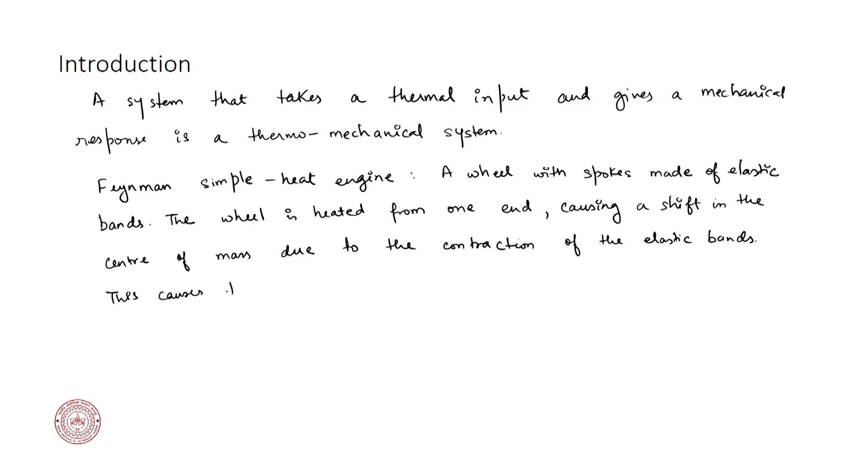due to the contraction of the elastic bands. This causes the wheel to rotate. So, we have a wheel, the spokes of the wheel are made of these elastic bands about a center of mass at the center.

Okay. So, initially this wheel is at rest, the center of mass is aligned with the axis of rotation. Now, we attach a heat source. Okay. So, this is a heat source, this is our wheel, and these are our elastic bands.

Okay. So, the rubber which is near to the heat source might change its composition, and based upon the type of polymer it might shrink or it might expand. However, any change in the length, either the contraction or expansion of the rubber, will cause a change in the center of mass or a shift in the center of mass of the wheel, which was initially perfectly balanced.

Since the center of mass has shifted, the wheel will try to manage that, and it will rotate a bit. As soon as it rotates, the rubber band that was exposed to heat will be exposed to the colder side or the cooler side, and therefore, those will again expand or contract in the other direction, and the new set of bands will be again exposed to heat. In this way, the wheel will be under continuous rotation.

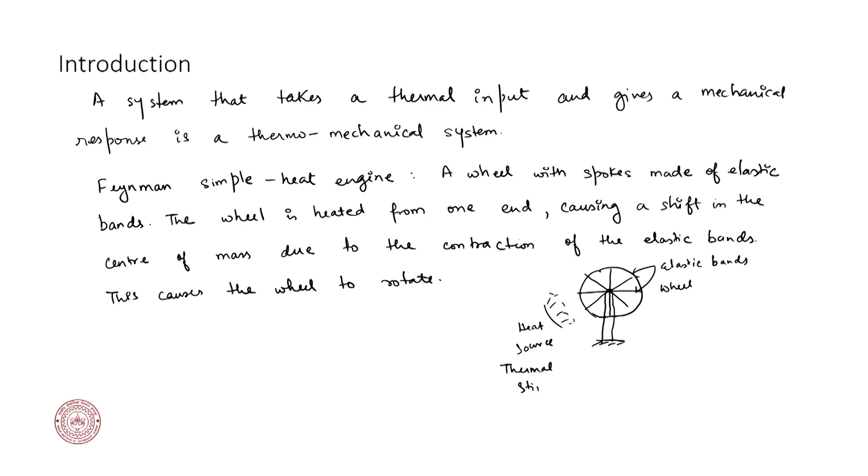The wheel is not rotating on its own. We have a thermal input that is driving the wheel to rotate, and therefore, a thermal stimulus is giving a mechanical response. Such a system comes under this category of a thermoelastic or a thermomechanical system.

Okay. And this mechanism of thermoelasticity is used in devices like micro electromechanical systems or nano electromechanical systems for causing motions like pull, push, or to perform some kind of work, bend, slide, etc.

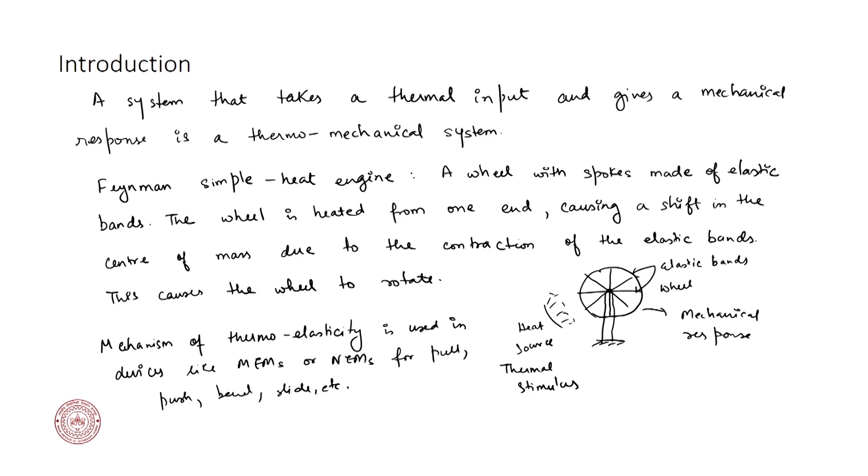Right. So, to these smaller structures you can provide inputs of heat, small bursts of heat, and heating can be done through an electrical contact via ohmic resistance. We have not gone into the electromechanical systems yet. However, electric heating is one of the most common ways of heating. So, you can provide small inputs of heat, and that heat would cause a mechanical deformation. That deformation is our output and can be used for certain aspects.

Okay. Now, we will talk about two phenomena. One is called the thermoelastic dampening and thermal stresses. So, two, we can say, mechanical responses that dampen or weaken a thermomechanical system. So, these are the two phenomena that work against this process of a thermal input converting into a mechanical output, and that is thermoelastic dampening and thermal stresses. So, what are they? The first one is your thermoelastic dampening.

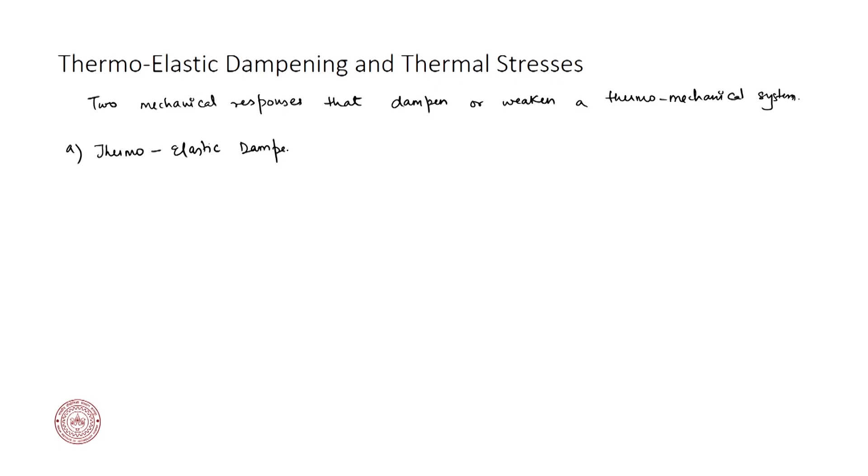Okay. So, when a surface is impacted by a pulse load, what I mean by a pulse load is that you hammer onto a metal surface, that is a shock load or a pulse load. The elastic waves are generated, and this comes from the Navier's equation. So, Navier's equation we see is a wave equation.

If you go back a couple of lectures into solid mechanics, we have derived the Navier's equation in depth, and we can see that the equation del square u by del t square equals some mu del square u by del x square is a wave equation, and that means these elastic waves would propagate through the body. So, as the elastic waves are generated, they propagate through the body and reflect at the edges.

Okay. So, if I strike it at one end, then the waves are generated from this point and they will propagate throughout, strike the end and reflect back. Likewise, they will strike the other end and reflect back. Okay. The reflected waves may collide with each other and get dissipated in the form of heat.

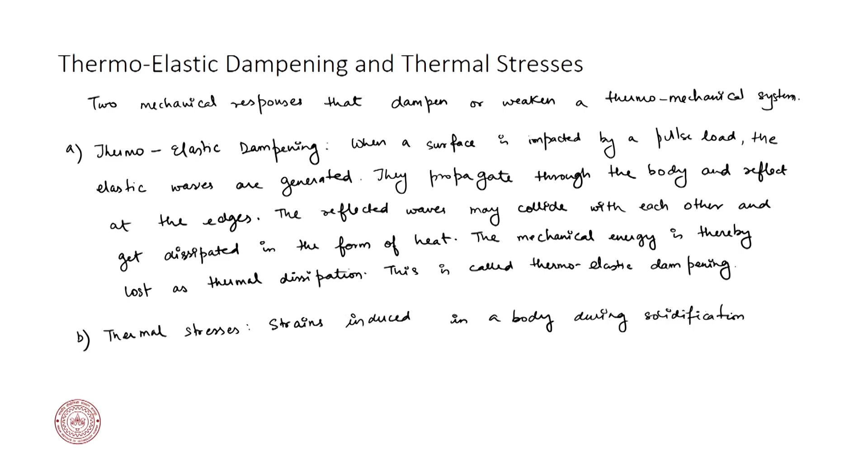The second type of dampening or degradation phenomena will be a thermal stress. That is strains inculcated in a body, or rather strain induced might be a better term, during solidification or cooling, and due to thermal gradient causes stress generation.

That is, if you have manufactured a body, that is initially it is molten and you have cast it and it is cooling down, or you have machined the body and locally the temperatures have increased, there is thermal gradient because surface is dissipating heat quicker than the bulk. So, there is a temperature difference. This temperature difference causes strains within the body, that is some part would have expanded more compared to another.

As everything would cool down to room temperature under constrained conditions due to the mechanical constraints, that is the surface is held together due to some reason, and due to the lack of free movement of the surface, these thermal gradients would induce localized strains within the body. These localized strains translate in the form of stresses, and these stresses are called thermal stresses.

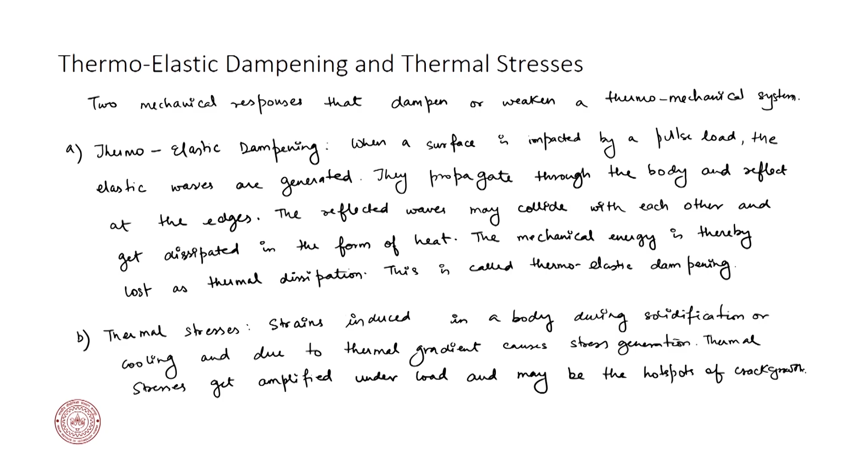These stresses are a major location of crack formation and dislocation growth, and when we impact the body or when the body is under load, these localized strains or stresses get magnified, and the magnification of these causes a fracture to propagate through. Okay. So, the thermal stresses get amplified under load and may be the hot spots of crack growth. So, these become the hot spot for the fracture to propagate or for the crack to grow.

Okay. So, these are the two dampening responses of a body. This is natural, it will be there in any mechanical system. There are ways to mitigate thermal stresses: if you allow a more uniform cooling, a slower rate of cooling, that is annealing compared to hardening, right. For those who study manufacturing sciences, if you cool down a body very gradually, then it does not develop thermal stresses and it remains more ductile compared to a body which is very rapidly dropped into a quenching medium, and it is hardened in that regard.

So, it becomes hard and brittle because of the development of internal stresses, and those stresses become the point of crack growth, and the body eventually fails. Right. So, apart from these two, thermoelastic processes can be used to get a mechanical response from a thermal input, and we will look at 6 examples of such thermomechanical devices. Okay. The first one is our thermopneumatic systems.

Okay. So, in these devices a gas couples the thermal source to the mechanical response or deformation. So, the heating does not directly cause the body to deflect or to deform. There is an intermediate gas or fluid which is taking that effect of the heat to the material that is getting deformed. So, that is a thermopneumatic device.

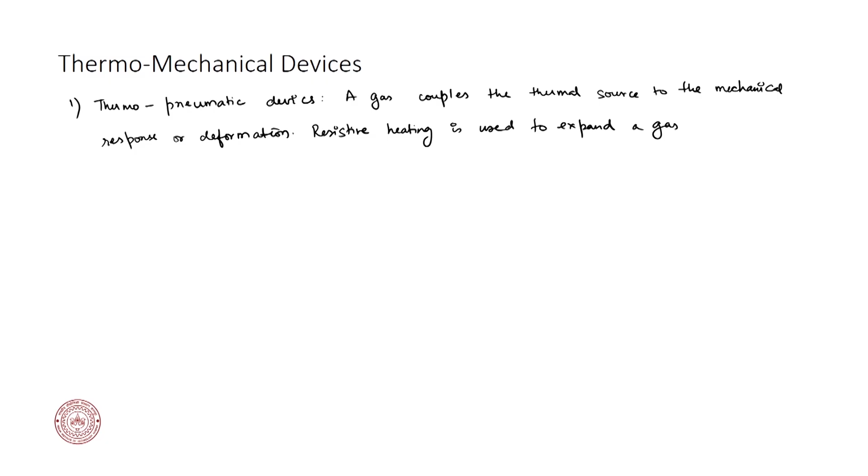So, the expanding gas will exert a pressure on a membrane or plate, which will deform. Okay, so, that is the basic idea behind thermopneumatics. Unlike thermoelastics, which will have a direct deformation under a temperature gradient, in this case heat is translated through a media to the body.

Let us take an example. So, one of the examples can be a peristaltic pump. So, a peristaltic pump, if I draw it, it is a very crude diagram. So, we have these small membrane pumps at the bottom. So, we have our flow through this tube. So, this is a tube. We have these small actuating devices. What they have is that the bottom plate is a resistive heater. So, these are resistive heaters.

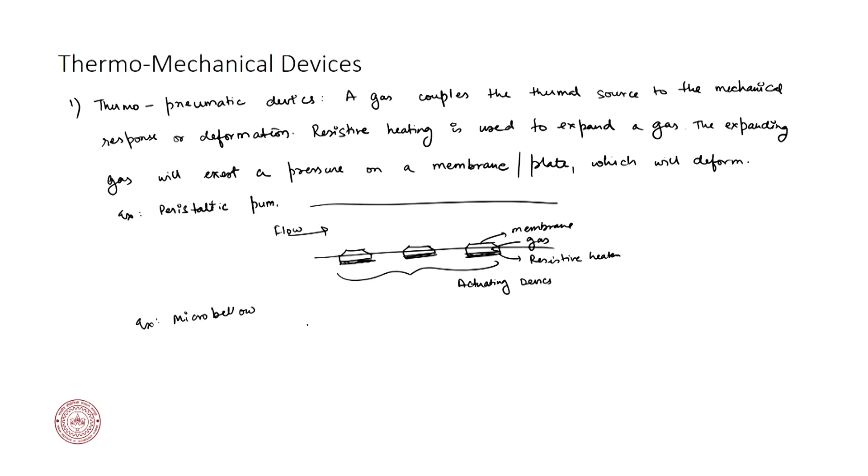Another example can be a micro bellow. So, a micro bellow device is this small segment of this actuating device. So, they have a membrane on the top, and they have a heater at the bottom, and this is filled with gas. They have a resistive heater, they have a membrane on the top.

So, this membrane is going to deflect as the gas would expand, and the actuation of this membrane can be used for some mechanical response, for example, in the peristaltic pump. So, we can put in small micro bellows at the peristaltic pump, and that will regulate the flow, right. Likewise, it can be used for other applications, where this deflection on and off of these membranes can be used for certain actuating purpose, right.

Okay. The second kind of device is a thermoelastic device. Now, this is what we typically would understand by thermoelasticity or thermomechanical response. So, in this case, the material deforms under the influence of a thermal gradient.

So, you can say that we have some form of a cantilever. You are giving some heat input from here that is causing a T hot and a T cold. This gradient would cause the cantilever to expand and to deform, and that deformation is used as an actuating purpose. So, the deformation is used to actuate a mechanical response.

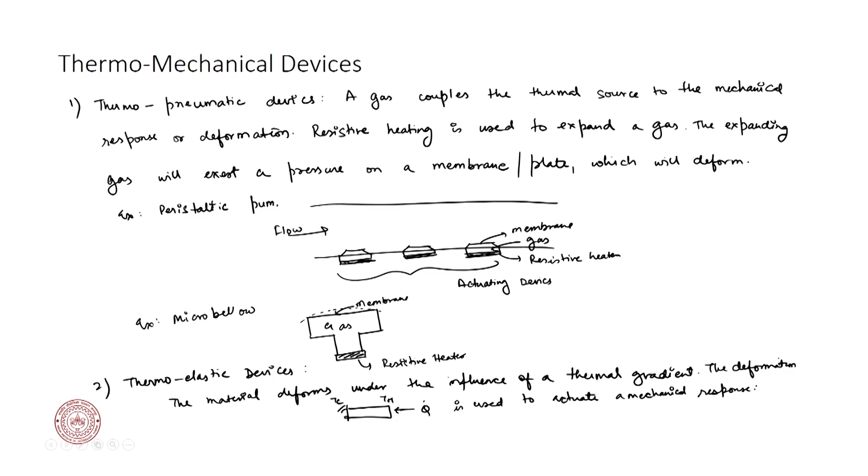Okay. So, this is a very simple example of a thermoelastic device. You are giving some heat directly to the device that is causing it to expand due to its thermal expansion coefficient, and based upon thermal expansion coefficient we will get some strain. That strain or that mechanical response can be used to actuate.

Okay. And the third one is a V-beam actuator. So, thermoelastic. Now, we are going into the domain of thermoelastic systems. Again, in this device what we have is two rigid plates at the two ends, and we have a structure connected onto a rod that is giving us the mechanical response. Okay. Now, we are giving electrical inputs to both the ends.

Which means that both these fixed ends are heaters. They are heating elements and they are at a higher temperature T hot. This central part is at a lower temperature T cold, and it is getting a force as an output in this direction. Okay. So, we are getting an actuation in this V beam, this elastic material. It can be made of any kind of alloy, it can be a polymer, based upon our objective to optimize based upon the thermal expansion coefficient.

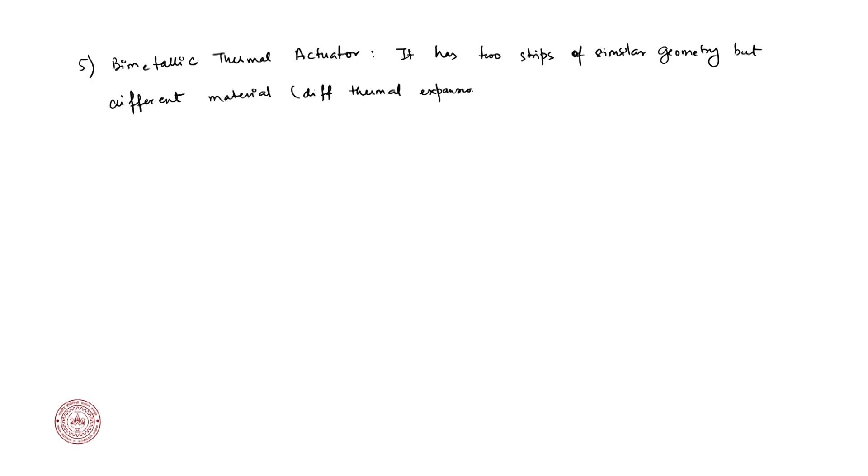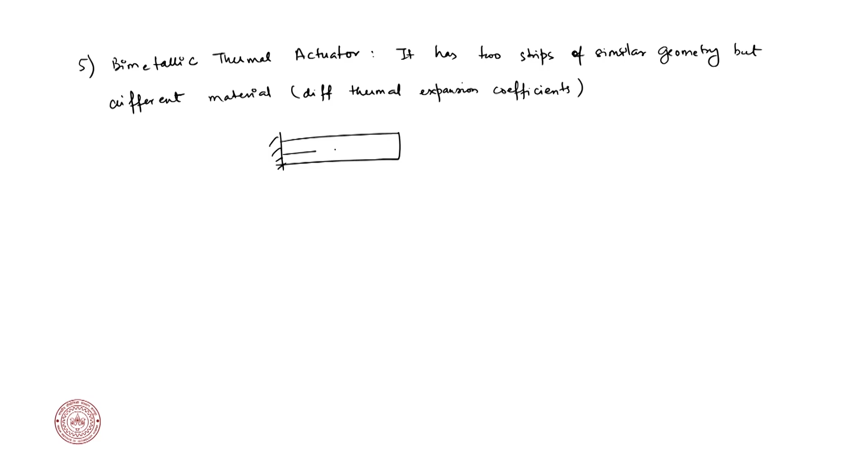Right. So, we can take, say, a cantilever, which is having two materials, more or less a similar geometry. You can take different geometries as well, but different geometries are more similar to this bimorph structure, which has the same material but different geometries. In a bimetallic actuator, you have two materials. So, you have an alpha 1 and alpha 2, more or less a similar geometry.

Now, if you put a thermal gradient, it will cause one strip to expand more compared to another, thus causing the structure to bend or deflect. And this is the kind of response we look for.

For example, if alpha 1 is greater than alpha 2, then the top would like to deflect or displace more compared to the bottom, and is likely to bend downwards. So, if you have, say, this is the bimetallic and it is divided into two halves, and you have an electrical contact like this, due to thermal difference, the top will like to bend more and it will deflect downwards, and the contact is cut off.

When it will cool down, it will come back to contact. So, we can have a thermal switch like this, which can cut off when a certain temperature is reached, and it will remove from the contact, and once it is cooled down, it will go back into the contact. And that is the beauty of a bimetallic actuator, a bimetallic strip.

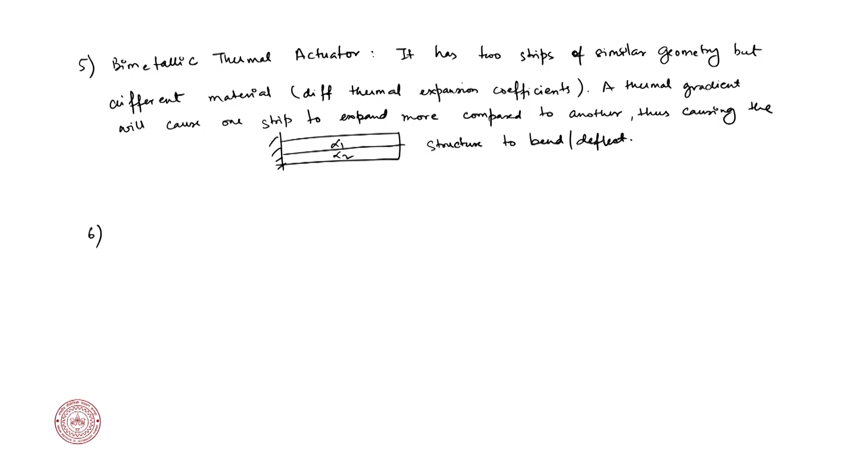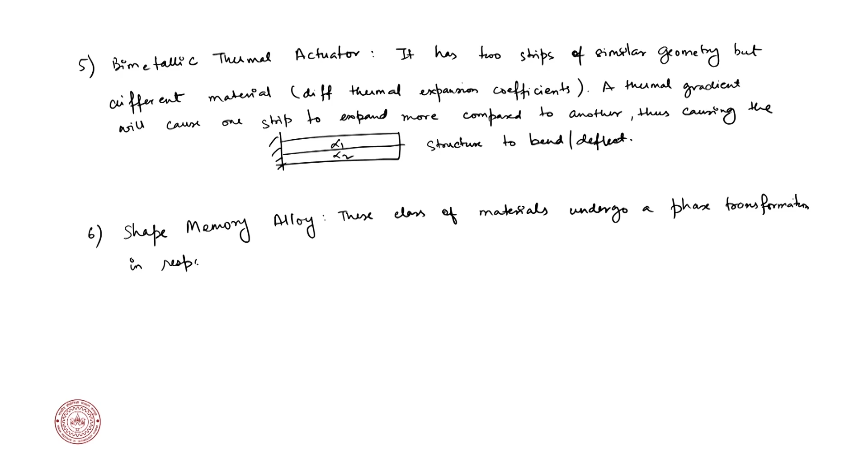The last one is quite interesting. It is called a shape memory alloy. So, what is a shape memory alloy? Unlike a bimetallic strip, in which the material expands and contracts, these materials, or this class of materials, undergo a phase transformation in response to a temperature change.

So, due to a temperature change, it will undergo a phase transformation, which, for example, steel can go from austenite to martensite, and these phase transformations can make the materials from less ductile to more ductile, and therefore, you can train the material to a certain shape or to take up a certain shape.

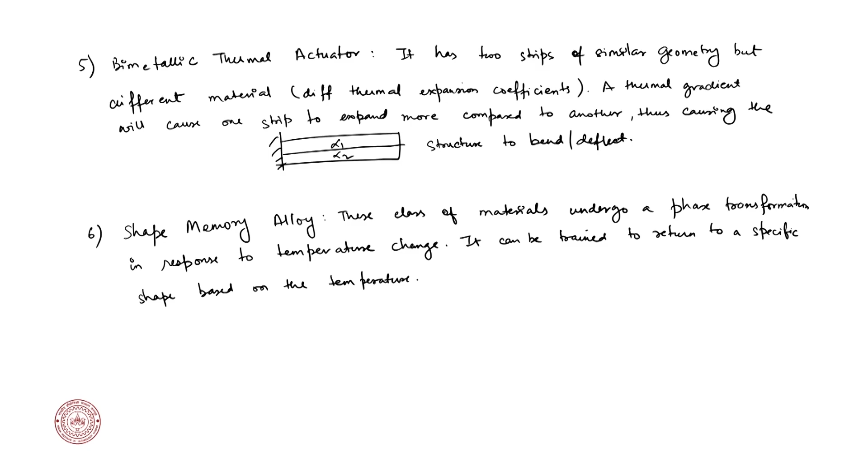It can be trained to return to a specific shape based on the temperature change. So, these materials can be trained to attain a certain shape at a given temperature.

Okay. Now, with this introduction, we know that there are several applications of these thermomechanical devices, and it is something that you can practically use in some sort of an engineering application, in a control system or the development of a larger equipment.

Right. So, we will start with the modeling or the development of a model for a thermo-pneumatic system. We will start with a very simple case of a mass spring system, and we will gradually move on to more complex systems. Okay. So, for a mass spring system, we can consider a piston cylinder assembly.

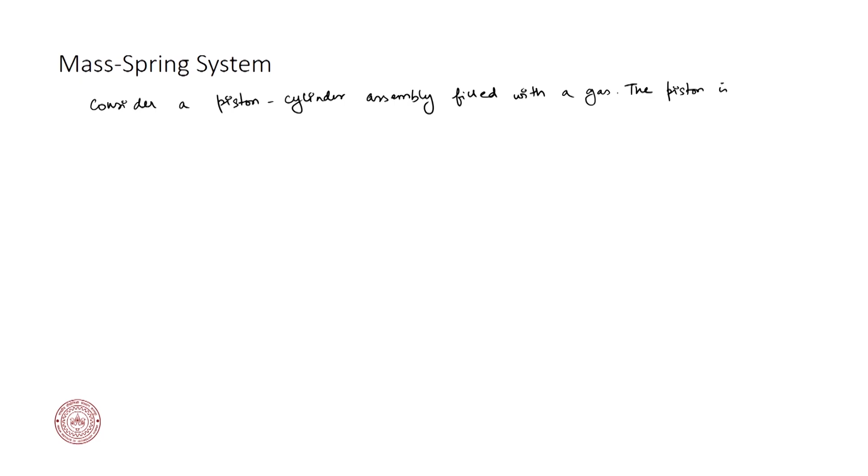Filled with a gas, the piston is connected to the bottom wall by a spring. Okay. So, let us draw this geometry out.

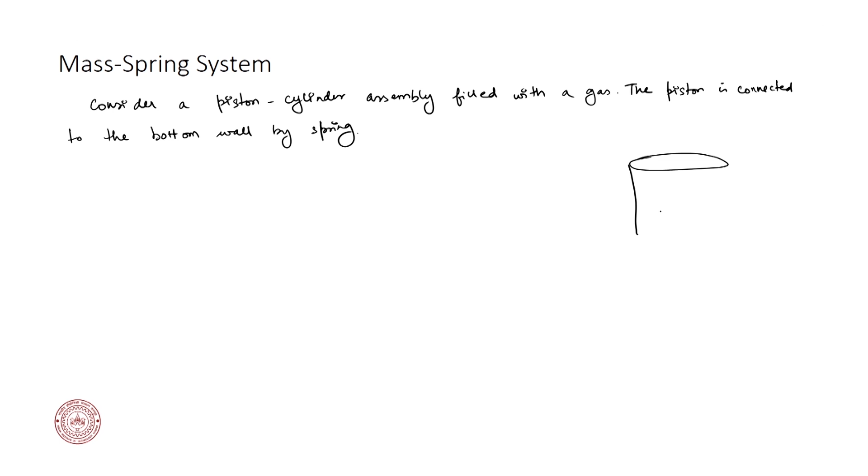So, you have this piston at the top, the solid piston, it is rigid. This piston is connected through a spring to the bottom plate and it is filled with a gas. The spring has a spring constant of small k. This is your piston and this is your cylinder. So, this piston can move based upon the expansion of the gas. It will most likely be going up as the gas is expanding.

The bottom wall of the cylinder is a resistive heater which will heat the gas. As the gas expands, the piston is displaced outwards. Okay. So, the piston will move up as the gas would expand. So, the bottom wall is a resistive heater. The gas couples the piston's movement with the heating input.

Okay. So, we are solving for two kinds of equation. One is the equation of motion. In this case, we have a spring mass system, and second is the thermodynamics, that is a thermal system. So, let us first start with our piston, that is the equation of motion. So, we can say that the volume of the piston displaced V as a function of time will be equals to area, that is constant, the cross sectional area of this.

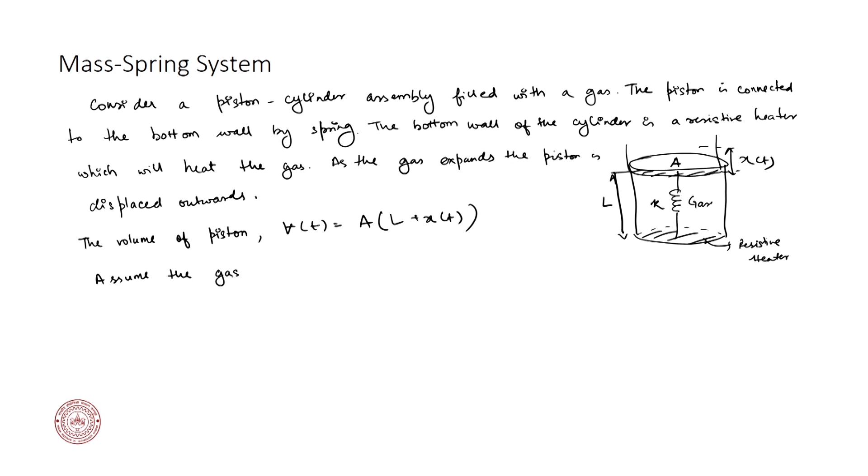So, we can say that PV is equals to nRT, where n is the number of moles, R is the universal gas constant, T is the temperature, P is the pressure, and V is the volume. Okay. Now, by Newton's second law of motion, we can say that the mass times acceleration is a summation of all the forces. Now, what kind of forces are acting? We have a spring that is pulling it back, that is minus kx, a small k, and we have a pressure that is pushing it upwards, that is P into A. We are not writing it vectorized because we have declared it is a one dimensional system, the piston is only moving up and down.

Okay. So, this is our equation of motion. We need to couple this pressure with temperature, and we can use our ideal gas law. So, we can say that pressure is equals to nRT over volume V. Therefore, m d²x/dt² will be equals to minus kx plus nRT into area over volume V. We can replace volume as A(L plus x), and we can rewrite this equation again, m d²x/dt² is equals to minus kx plus nRT over (L plus x). This is our equation of motion. This is our first equation.

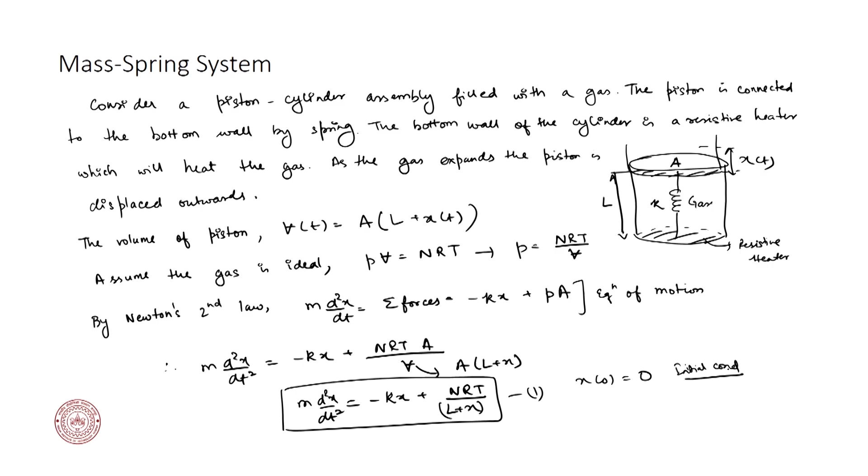Of course, we need boundary conditions for this. We can say that at x equals 0, the length is L. So, x at time 0 is equals to 0. It is not displaced and it is at L. Okay, so, this becomes our initial condition of motion. So, this becomes our first equation, our displacement equation. Then we go into our thermal equation. So, the thermal equation will be our equation of T related to x. So, again, from this equation of motion we are relating x to T.

In the second equation, likewise the T, that is the temperature, is also dependent on x of t. So, it is dependent on the position and time, okay, and we need to derive an equation for this. So, for that, since we are using an ideal gas for expansion, we can consider that the first law of the system is applicable, and we can apply the first law for this kind of analysis.

So, from first law of thermodynamics, we have change in internal energy is equals to change in heat plus change in work done. This is our first law. If we integrate between two states, say the initial state is at time t and the second state is time t plus dt.

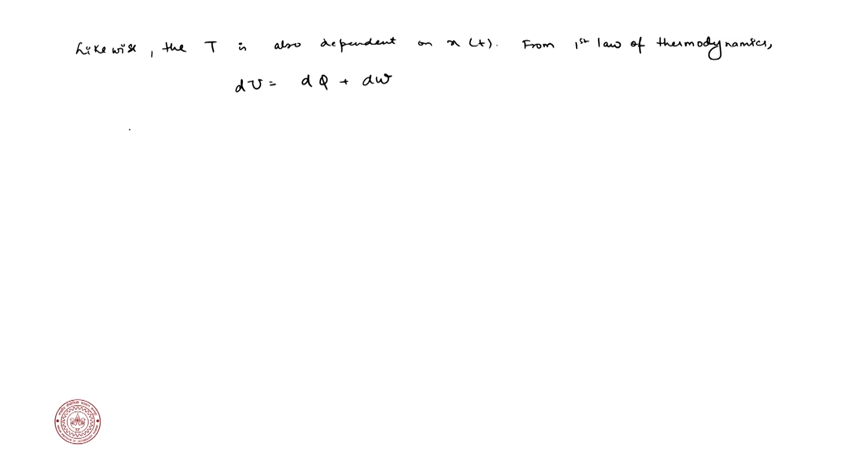From t to t plus dt, that is t is state 1 and t plus dt is state 2. We will integrate from t to t plus dt of du, which equals the integration from t to t plus dt of dq plus dw. Okay. Now, we need to find out each of these, dq and dw.

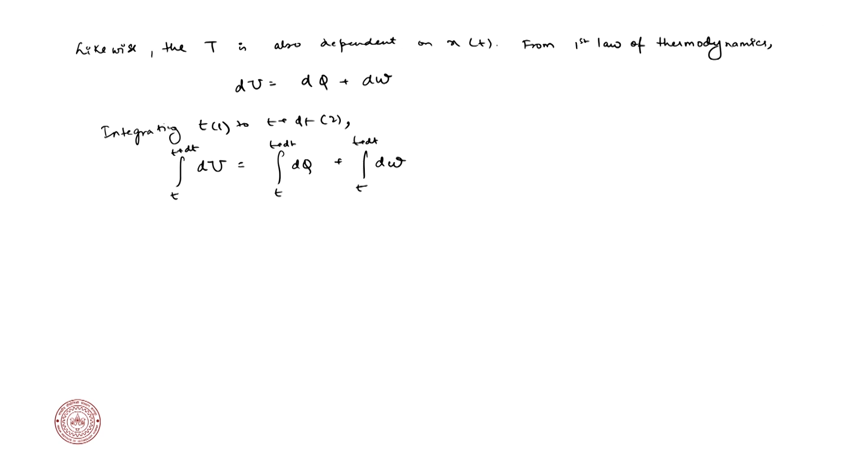So, for dq we know that the energy that is being put in is lost in terms of convection to the surrounding. So, the heat is convected. I am sorry, the heat being generated by the plate is being transferred into the gas via convection. I was thinking of a different problem.

So, say that the hot plate is at a temperature Th and the gas initially is at a given temperature, say Tc, and as the gas gets in contact with the hot plate, the heat is transferred from the hot plate to the gas and the gas gets heated up. So, we can say that dq by dt equals minus h A (T minus Th).

Okay. Now this gas is getting heated up and is going to expand and do some work. So, there is some pressure and there is some change in volume. So, we can say the work done by the gas due to expansion, that is dw by dt, equals minus p into dV by dt. So, pressure is a function of time, into dV by dt, right.

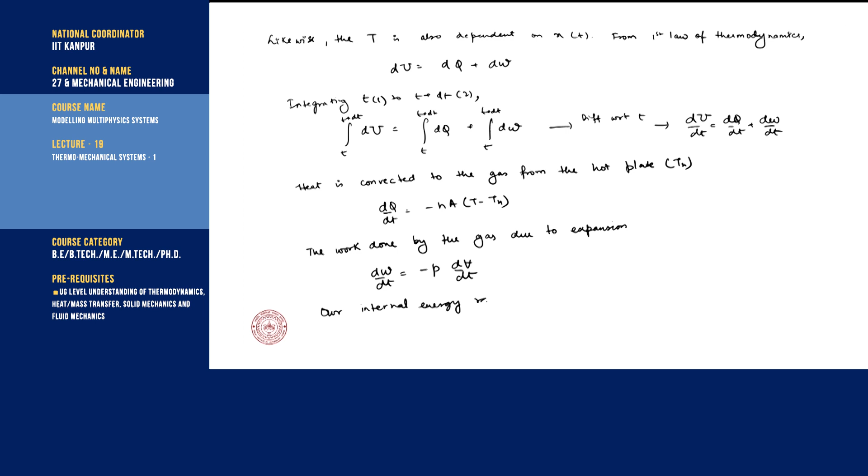Okay. So, if both of them are there, we can differentiate this equation with respect to t, and we get du by dt equals dq by dt plus dw by dt. Therefore, our internal energy rate we can write as du by dt equals minus h A (T minus T hot) minus P into dV by dt.

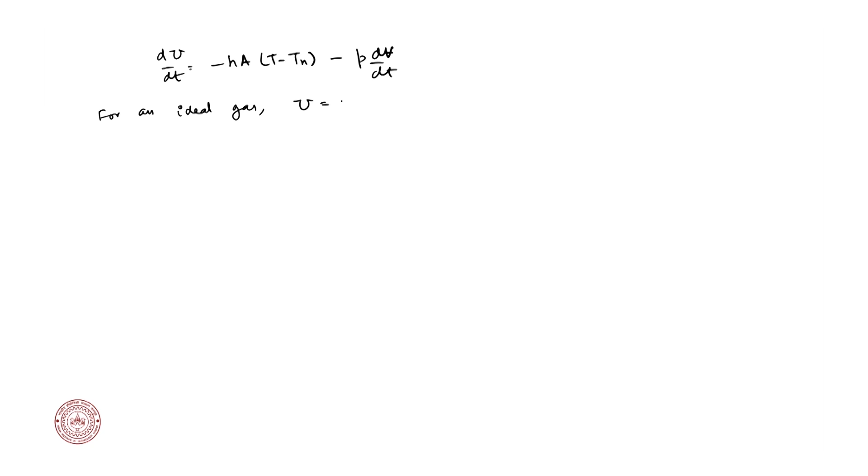Okay. Now, we can try to relate this somehow to our displacement. First of all, we need to know what U is for an ideal gas. U equals capital K into nRT, where K is a dimensionless constant, and depends on the degree of freedom. For a monoatomic gas, it is 3 by 2, for a diatomic gas, it is 5 by 2, and so on. That is the value of K.

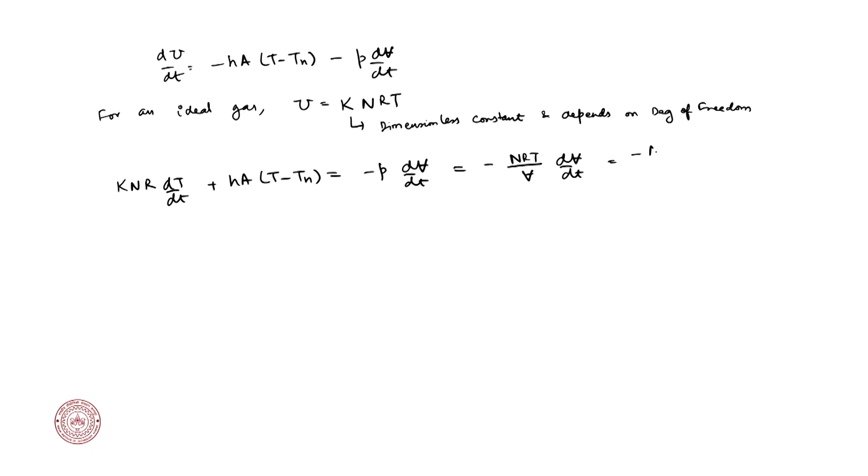So, we can substitute this in this equation, and we can say that K n R dT by dt plus h A (T minus Th) equals minus P dV by dt. We can substitute this P from our gas law, that is minus nRT over V into dV by dt. We can write V as area into L plus x. So, minus nRT over area into (L plus x), and this becomes dx by dt. Okay, and the area comes out.

The areas will get cancelled, and therefore our heat transfer equation becomes K n R dT by dt plus h A (T minus Th) equals minus nRT over (L plus x) into dx by dt. This becomes our equation 2. We also know the initial condition: the temperature at 0 equals some initial temperature T0. That is our initial condition for our heat transfer equation.

Now, if you see, our heat transfer equation, or thermal transport equation, that is the temperature changing with time, depends not only on time but also on the spatial x, that is the displacement, and our displacement equation 1 depends not only on time but on temperature as well. So, this is called a two-way coupled equation, where equation 1 depends upon the variable of equation 2 and equation 2 depends upon the variable of equation 1. Okay.

Now, what we can do is that we have a lot of constants: this capital K, n, R, then h, A, the piston mass, the spring constant. All of these we can club into some dimensionless constants, and that is the role of non-dimensionalization. So, we can do a non-dimensionalization.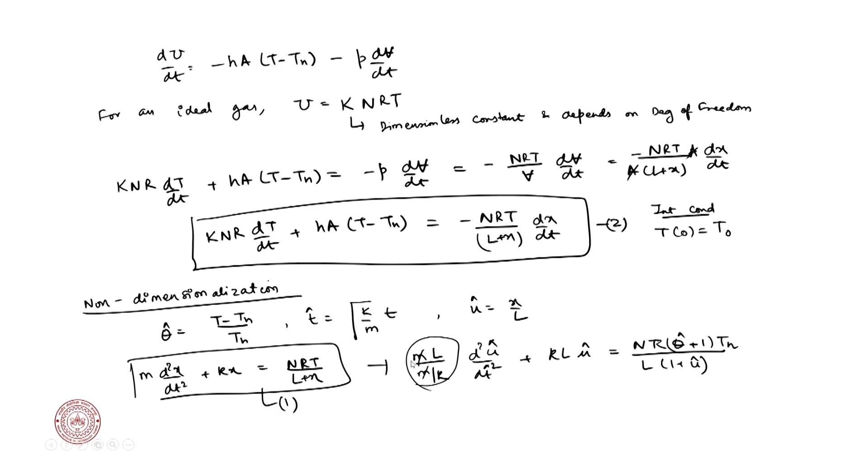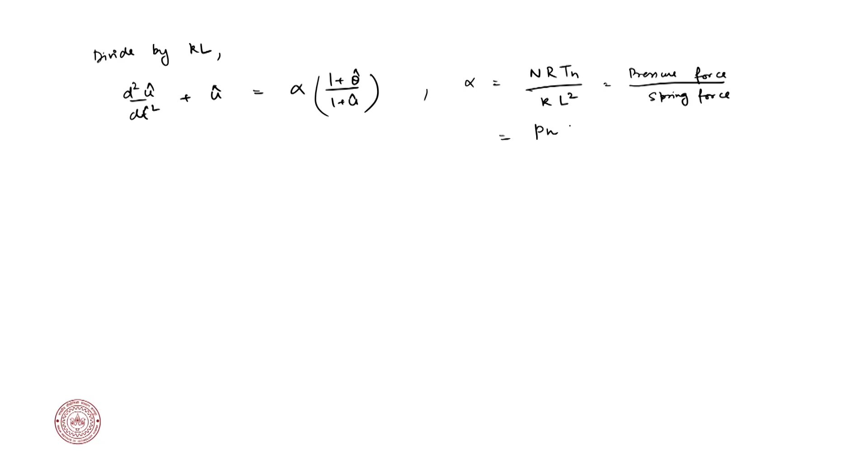What is alpha? Alpha will be equal to nR into T hot divided by small k into L squared. So, in some respect it is a ratio of your pressure force to your spring force. Now, how is this pressure force? nRTh, if you multiply and divide by volume, becomes pH. Volume is A into L, the initial volume, over kL squared. So, this L cancels out, and it comes out to be pH into A over k into L. This is our initial spring force.

pH is the pressure when the gas is at Th. So, when the gas is at Th and has expanded, that is the pressure of the gas, right. So, this becomes our equation. Let us say this is equation 3.

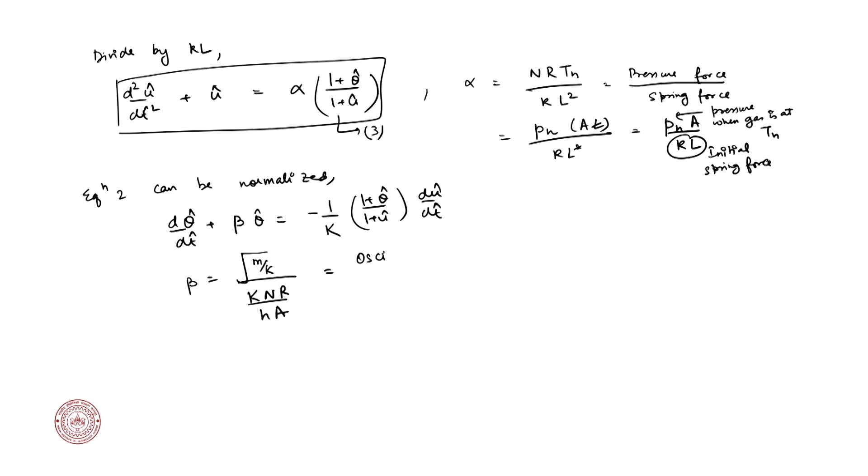Likewise, equation 2 can be normalized, and the equation that we will get is dθ̂/dt̂ plus beta into theta hat equals minus 1 by capital K into 1 plus theta hat over 1 plus û into dû/dt̂. Here beta is equal to square root of m by k over capital K nR over h into A. What is this? This is the ratio of the oscillation time scale to the thermal transport time scale.

So, these non-dimensional constants are extremely useful. They tell us whether we can keep a term or reject a term. Now, to solve this type of equation, we can take two approaches. One will be an analytical approach. This is a coupled equation; you cannot fully solve it analytically, it will be very difficult. So, for the analytical approach you will need to do some simplification.

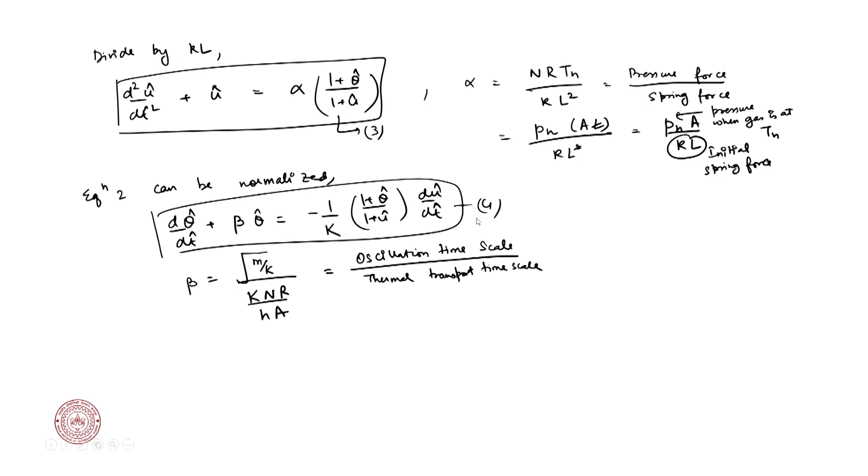We take steady state: theta hat equals 0. Theta hat will be 0 when the temperature equals Th, meaning the gas has reached steady state at Th, that is T equals Th. Under that condition, if you look at our first equation, this is equation number 3: this term is 0, and û will be equal to alpha over 1 plus û.

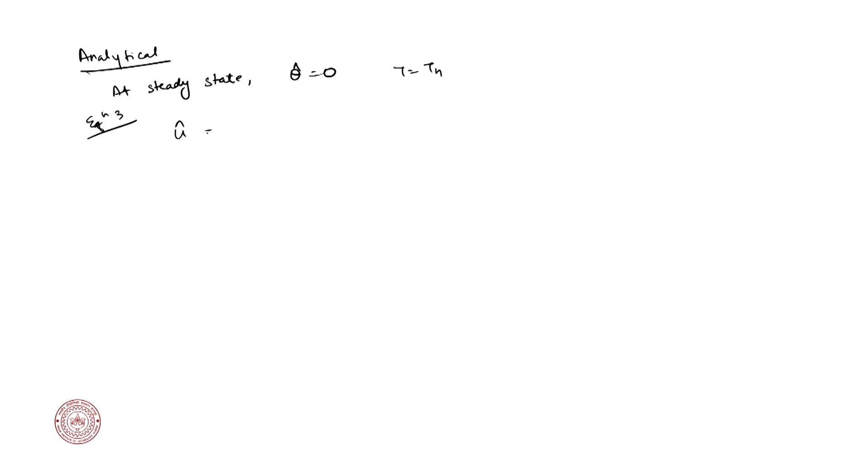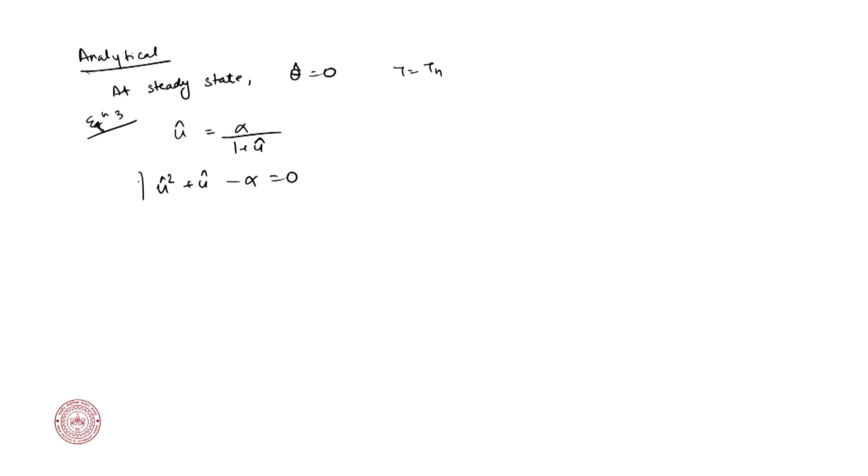So, from equation 3, u hat will be equal to alpha over 1 plus u hat. So, this becomes our equation. Therefore, u hat squared plus u hat minus alpha equals 0. This is our equation. What we can get as an output is u hat equals minus 1/2 plus or minus 1/2 square root of 1 plus 4 alpha, right.

Now, u hat we know is x over L. If we take the negative counterpart, then u hat will be less than minus 1. That means the piston plate has crossed the bottom wall, and that is not possible, right. It cannot break through the resistive heater. So, that case is rejected. We can only take the positive case. Therefore, u hat equals minus 1/2 plus 1/2 square root of 1 plus 4 alpha,

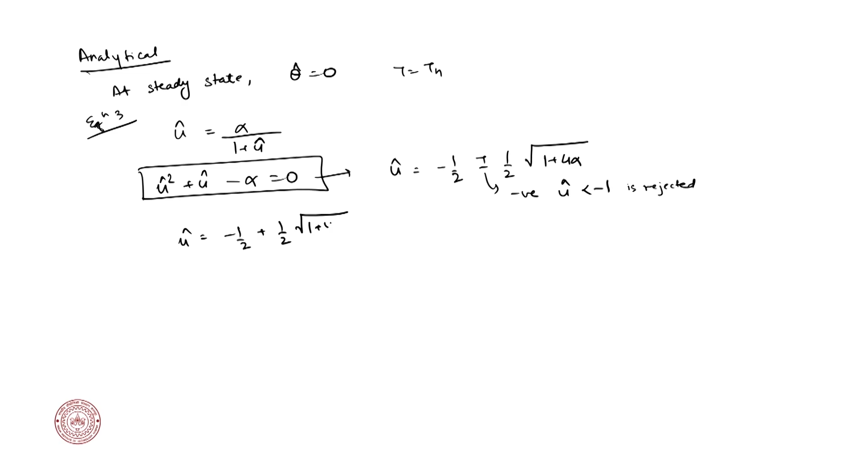and this is our solution. Now, if alpha is very small or alpha tends to 0, that is, our pressure force is very small compared to the spring force, in that case we can linearize our equation. So, linearize our equation, and we can get that u hat will be proportional to alpha into L, which is proportional to pH. The alpha is pH into A by KL. So, pH into A over K.

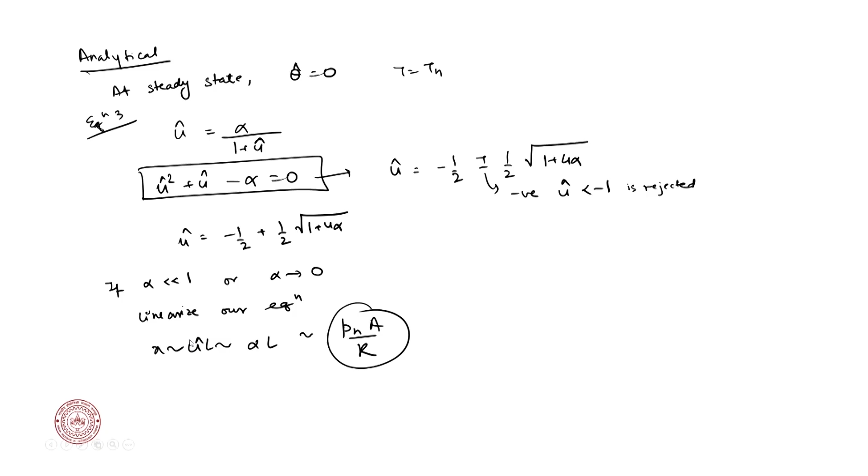Okay. Which we can say that the pressure force is balanced by the spring force, and the equilibrium distance is this u hat into L, that is x. So, this is the equilibrium distance x at which the pressure force balances out with the spring force. Now, again this process can be done numerically. You can solve the entire equation. If you look at equation 3, I will just write down one, and the second one you can try yourself.

So, d squared u by dt squared plus u hat equals alpha into 1 plus u hat by 1 plus theta hat. So, this is a second order time derivative. What you can do is discretize this equation: u hat of i plus 2 minus 2 times u hat of i plus 1 plus u hat of i, or if you want central differencing, then i minus 1 and i plus 1, divided by dt squared, plus u hat of i equals alpha of 1 plus u hat of i by 1 plus theta hat of i.

Now, we do not know what this theta hat of i is. So, in that case we can take a guess value of theta hat of i, and we can iterate over this. Likewise, you can set up a similar equation for the theta hat condition. This du by dt will be u i minus u i minus 1 by delta t. So, numerically this problem can be solved.

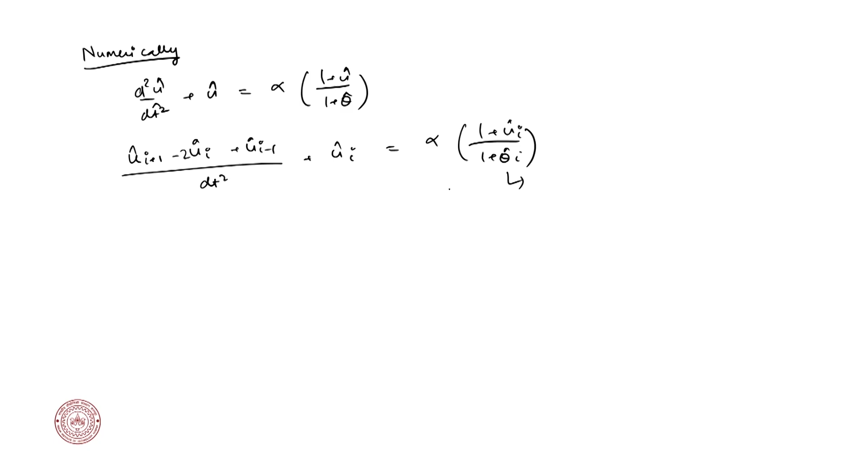In the next lecture, I will show you an output plot of how this looks, considering some values of alpha and beta, and then we will move on to membrane based problems. From that, we will finish off the thermomechanical model considering a thermoelastic system, try to solve this problem analytically and numerically, and finish the thermomechanical problem.